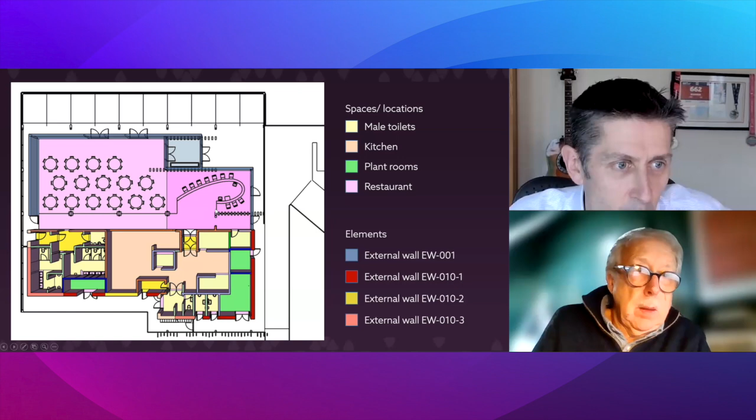And I think you've done a nice illustration for us just on this slide sequence here. It's quite a simple building, I know maybe most projects people work on are more complex than this, but you've got a floor plan here, and you're sort of breaking it down into the spaces and then the elements that define those spaces. Can you say a bit more about that please?

Yeah, I suppose early stage design is all about activities, and then accommodating activities in spaces of the right size, with the right environmental conditions, the right outlook, the right amount of light, all that sort of thing. But those spaces have to be defined by elements. That's really what an element is fundamentally designed to do.

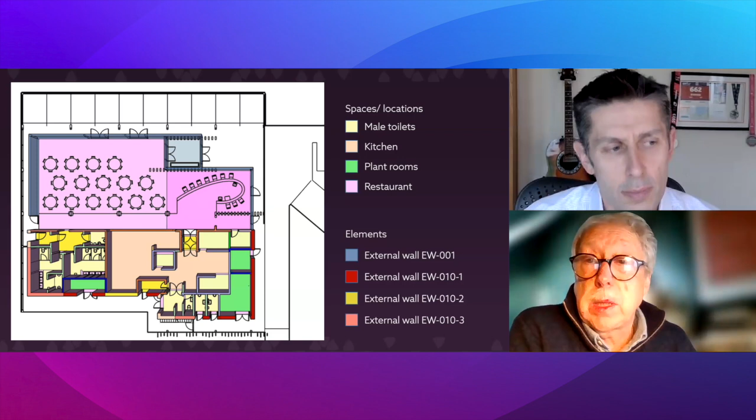And in the early stages, that element may simply just be a line on a drawing. It's just a line saying I'm a wall. In due course, it'll become a wall with some information attached to it, the U value, the fire performance, and then in due course, we'll attach systems to it, because we're really thinking about Uniclass particularly here. And Uniclass is clever because it allows us to build relationships between products and systems, and now between systems and elements. I think that's a big move forward.

Yeah, and I was saying in terms of the color coding here, I imagine if I was standing outside the building and looking at this back wall, it might look the same in terms of the material on the outer leaf, but you've got it color coded in terms of different wall elements. Can you say a bit about why there's a different color for the back of house compared to the kitchen or what have you? It's interesting.

The external wall of a building can look like it's the same all the way up, but it's affected, the way it's built up is affected by what it's enclosing. So if a wall's around a plant room, for the sake of argument, it's maybe a different wall on the outside compared to a wall that's around an office or around a bedroom, because the performance of the wall has got to reflect the overall performance of what's happening inside, or impact, or actually define the performance of whatever's happening in the space. So it may well be that the outside's timber clad or copper clad or whatever, but the insulation, the U value, the acoustic performance, the internal finishes will probably all be subtly different.

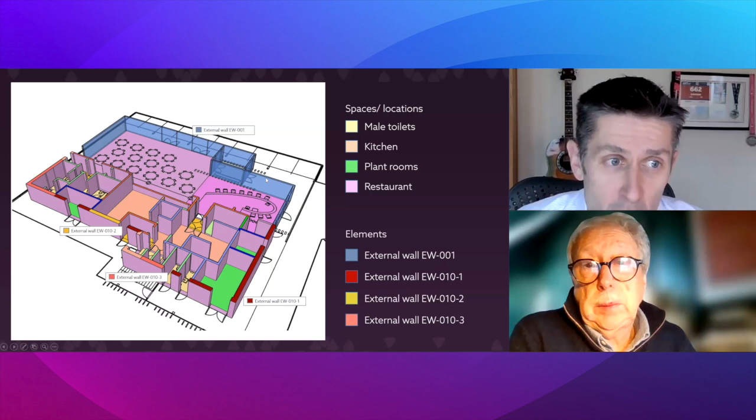But I think they're all parts or types of the same element, is the approach we've got to take there. So you said, looking at this, we have a sort of, I can't remember exactly the naming convention here, but like EW must be external walls, and then 001, and then you've got a 010. So I imagine they're fundamentally different elements, and then there's sort of variations in performance. Variations of type.

Yeah, I think interestingly, this is a Uniclass element, so it will have a Uniclass code. The Uniclass coding can only be limited. It can't accommodate the number of variations you can get on an element. It just can't be done. So we've tended to expect that people will adopt the typical way of calling things wall types, or roof types, or floor types. So we've used that as an illustration here.

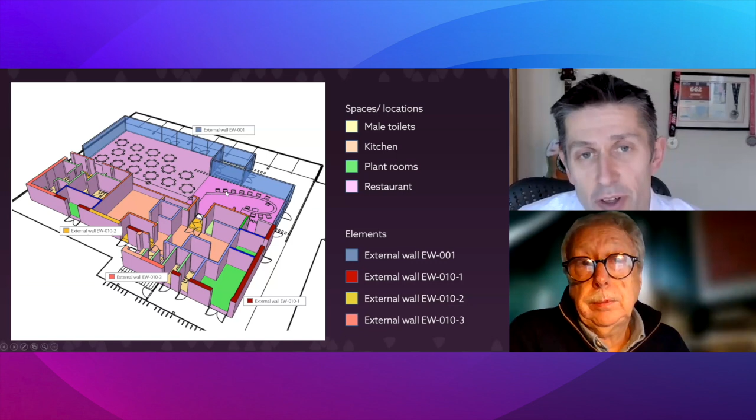We're not saying there's only one way to do it, but I think many architects will be accustomed to building wall types in this sort of way. And just like we're showing walls in this illustration, there'd be similar principles for the floors and for the roofs as well, and for openings, yes. Yeah, and of course the doors and the windows and hatches and things as well.

Yeah, and I think, we've talked about this a little bit, but you could have a completely different set of systems that are put together to give exactly the same minimum performance requirements. Yeah, one of the advantages of having an element at the early stages with a U value and a fire performance and whatever, is that you may be gathering all that information before you've really decided what the building's made of.

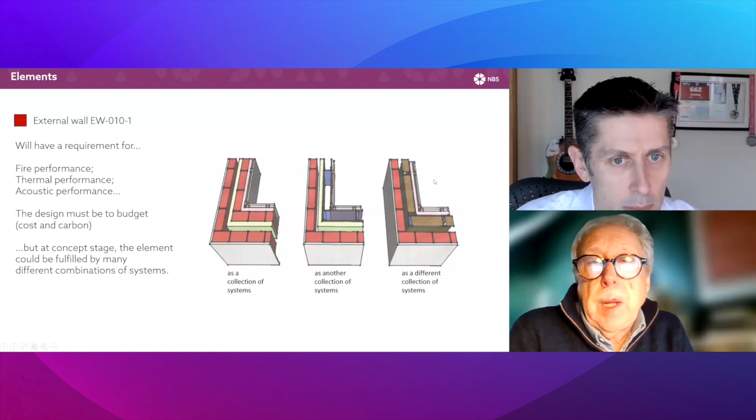And really what we're illustrating here is that each of those different constructions, one's masonry, one's timber frame, one's metal stud, with insulation in different places, effectively all can achieve the same fire performance, the same acoustic performance, the same security performance, but they can change.

The element information's got to, I think, remain constant through the timeline, so that you've got this constant requirement that you can compare your substitutions against, you can compare costs against, you can change your mind as you go along, subject to always having the high level performance or design requirements set in the early stages.

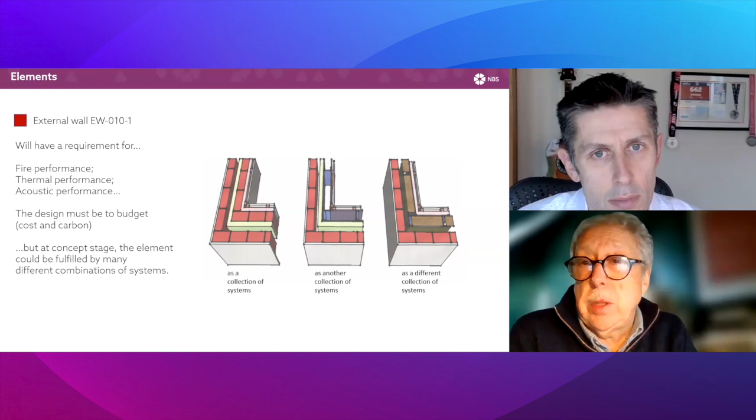That also lets you, when you get to the end of the line, check and see if you've been successful, and when you verify the job at the end of the day, did we achieve what we set out to achieve? And the answer should be yes. Yeah, yeah.

And then I think, this is something, we've got the core NBS content that we're going to look at in a moment, but we've also been partnering with the Building Cost Information Service. I think it's still quite a part of the Royal Institution of Chartered Surveyors, but we've been working with them to give indicative, so not to the nearest pound and pence or not to the nearest decimal place on embodied carbon, but an idea of if you're going for this sort of build-up, relatively speaking, it's 20% cheaper or it's 20% worse for

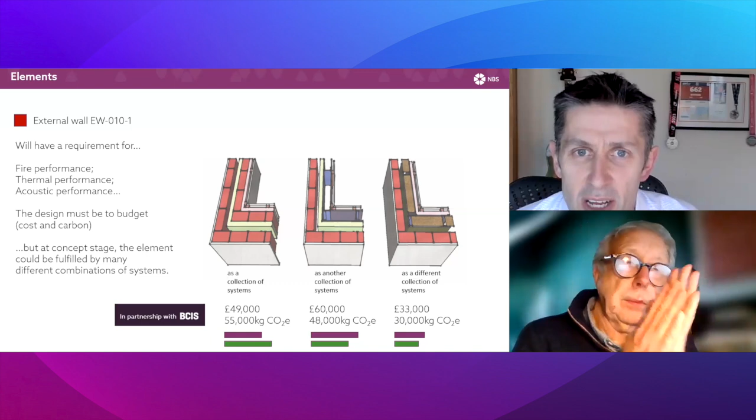the environment. Is that early stage where you have that discussion with cost consultants and clients and sort of tighten up that sort of budgeting? Yeah, I think that sort of budget, it will depend on the scale of the job and the practice that's involved. But generally, at very early stages, when you're thinking about the whole complex, the whole building, the whole project, you'll have an overall budget that will allow you to set the tone at the early stages.

So you will have decided if it's going to be masonry fairly early on. You will have decided if it's going to be a concrete structure rather than a steel structure fairly early on. But if you chose to change it at any time, then you've got the comparison to be made as you go through the process, basically.

Yeah, and I guess one of the worst things as an architect is you put a concept design in front of a client, and then the cost consultant on the other side of the table says, "Look, that's 50% over budget." You want to sort of keep that design within the parameters of the project.

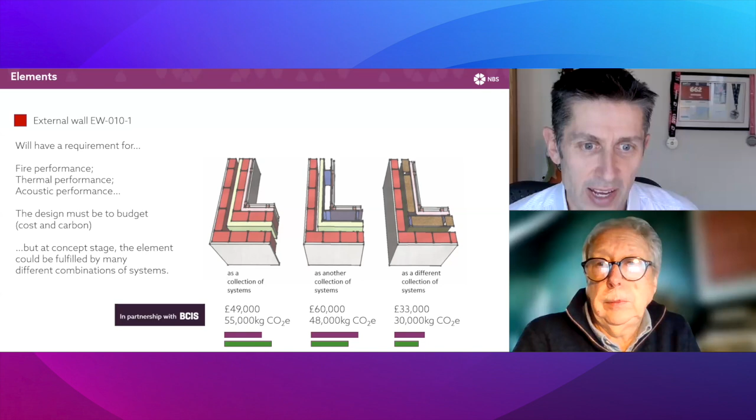Yeah. Yeah, and I guess early stage, it's still possible to change direction and make different decisions. The longer a project goes on, it makes it increasingly harder to change decisions, I guess. I think, well, you can always change your mind. I mean, that's part of life.

You can either change it because you've come up with a better answer or a more economic answer, but there has to be some fundamental system whereby you set out your targets to begin with, you set out your design and performance requirements to begin with, you agree them with the client, and they become fundamental to the contract, basically. As you go along, things may need to change, but at that point, they should only really change with a design approval from the team and from the client, but that will happen.

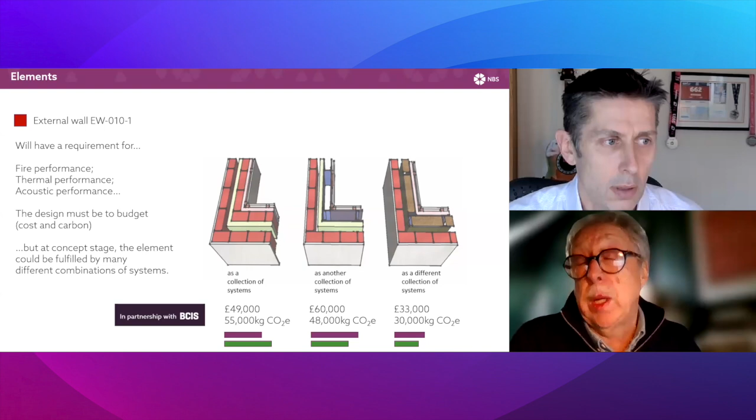Yeah, yeah. And then what we've got here on the screen is little extracts from the clauses that we'll show in the software itself in a second. But I guess the idea is that you just start adding little bits of information as you start to understand it. So what we're seeing on screen here.

The first thing you're going to talk about, once you've got the job, is with the client to decide what the brief's going to be. And for the brief, generally, we would have had a large document which would have spoken in high level principles and ambitions, but very soon would have got into detail of how the activities, the spaces are to work, and consequently how the elements are to work, what the construction is.

So at the early days, interestingly, the use of language would be different here, because this is not a technical specification. This is a communication between client and architect that can be shared with the public or with people who are less technically minded. So besides thinking about early stage topics like the client brief, planning, building control, there's probably different language styles you're using at this point as well, because it'll begin to become more and more technical as you go through the timeline.